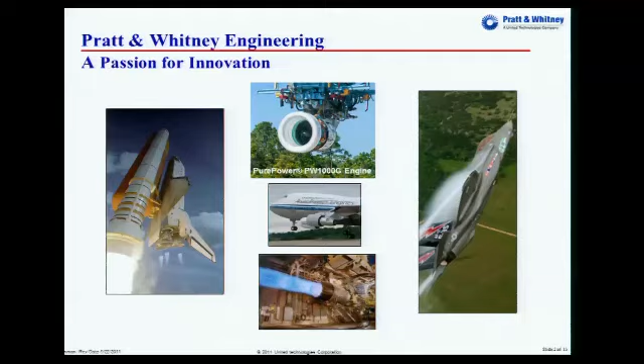All right. Okay, I work at Pratt & Whitney. We used to be Pratt & Whitney Aircraft, and now we're just plain old Pratt Whitney. And Pratt Whitney is the world's largest laboratory or incubator for model calibration and emulation methods. And we also produce jet engines and rocket engines at the same time. But I like to think of it as my own personal laboratory for all the methods that have been developed over the last several years. But in the meantime, we do make something of value every now and then.

We make jet engines, these liquid rocket engines on the back end of the space shuttle are ours, as are a whole lot of commercial and military jet engines. Okay, so the entire title of this seminar was Accelerating Industrial Productivity via Deterministic Computer Experiments and Stochastic Simulation Experiments. Well, I'll tell you just a little bit about how it has accelerated our industrial productivity.

This was sort of a last-minute presentation, so that means a couple of things. That means that some of these slides are as new to you as they are to me, nearly. And number two, that I wasn't able to add a lot of fresh content to it, unfortunately, because it takes a month to get through our legal staff and our legions of vice presidents and so forth.

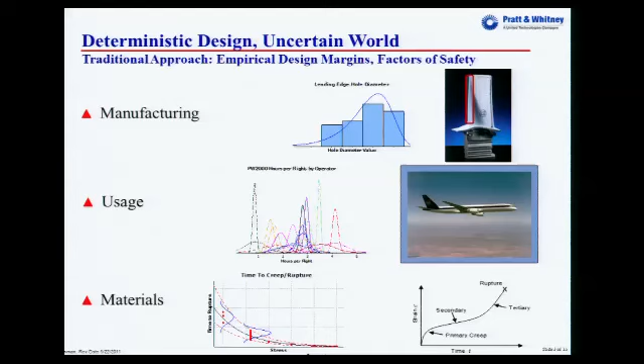But be that as it may, in engineering, prior to the use of probabilistic methods, the engineers have long recognized that they have issues to contend with due to variability in the real world and uncertainty in their models. And they've traditionally approached those using design margins or factors of safety. And here is just a sampling of the types of things that we've had to contend with. Variation in manufacturing processes, variation in the way our customers use our product, and variation in material properties is just a very small sampling of what we have to contend with every day.

But those traditional methods only get us so far. Number one, if you add design margins or factors of safety, how do you know how much is enough? For a given new engine design, should I double, triple, or halve my traditional design margins? And so in order to avoid those sorts of questions, we really need to do things probabilistically.

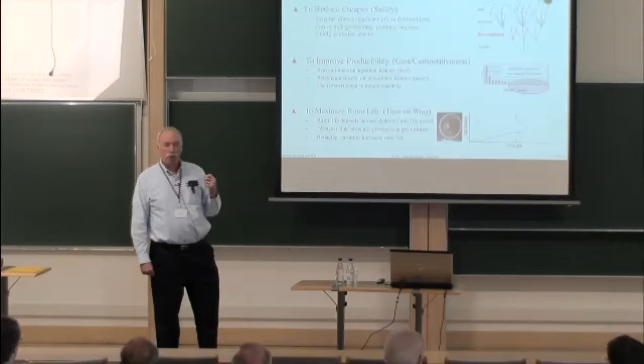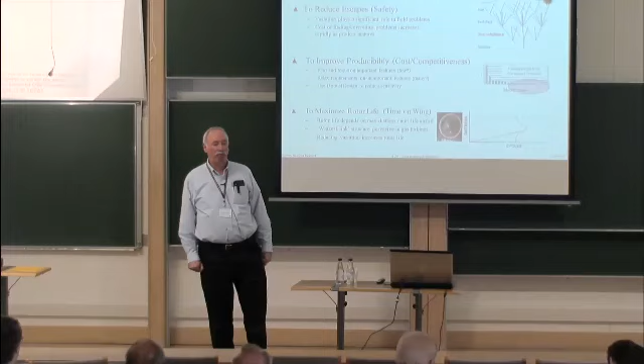And the first person, to his credit, to really discover this from the engineering perspective in our organization was our senior vice president for engineering, who about 2 or 3 months after getting into his job, shut himself in his office for a weekend, went over all the issues that had come across his desk in those first 2 or 3 months on the job, and asked himself, what was in common? What are the common threads running through all these engineering issues that I've had to contend with?

And his answer to that question was every single issue only had one or two things in common. It was either variability that hadn't been designed adequately against or tested adequately against, or uncertainty in models that wasn't adequately accounted for. Okay, so he was my first benefactor who got us started.

That was a few years ago when we actually got a little bit of development money, and we started something called the Uncertainty Quantification Initiative, where we just had to decide how we were going to quantify uncertainty. What paradigm do we use? Do we use fuzzy math? Do we use the Bayesian paradigm? Do we use a frequentist paradigm? That sort of thing. So we spent about a year answering that question.

And then my second benefactor came along, our next vice president of engineering, who took me under his wing and said, you know something? This can pay for itself. It doesn't have to cost engineering a cent. And he said the reason it can pay for itself is when you do one of these variance-based sensitivity analyses, you always show me this nice Pareto chart. We're always worried about things on the exciting end of the Pareto chart, things that make a real difference.

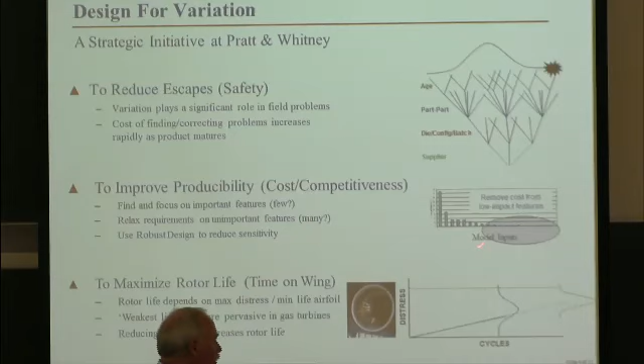But he said, don't neglect things that are on the far right-hand side of that Pareto chart. That's where you're going to pay for yourself, Grant. He said, these are things that we might spend a lot of money controlling in production or in engineering that are really having very little impact on the product.

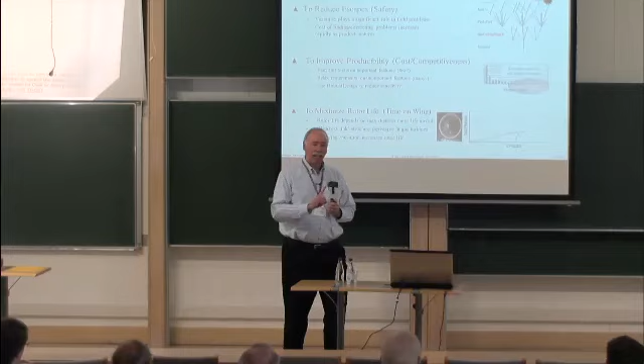And in fact, we found one tolerance that we were holding to tenths of thousandths of an inch on one bearing in one commercial engine, where if we were able to relax that tolerance just a small amount, it was about a $300,000 a year savings in that one tiny little tolerance. So that paid for much more than myself.

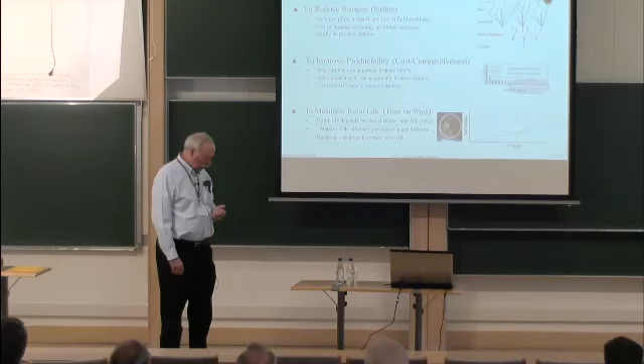Okay, and lastly, there are certain problems that can only be approached probabilistically. Jet engines, as you'll see, have one thing in common. You'll see rotors, rotating airfoils, and stations of stators where we might have nominally 70 identical stators in one position in the jet engine. These are 70 nominally identical parts, but they vary slightly because of production differences or manufacturing

quality differences. However, in the real world, that rotor life, in other words, how long that engine stays in service, is going to depend on the airfoil with the maximum amount of distress or the minimum life. That means that we are going to have a weakest link structure throughout that gas turbine engine. And if you don't approach that problem probabilistically, then you're not going to solve this problem.

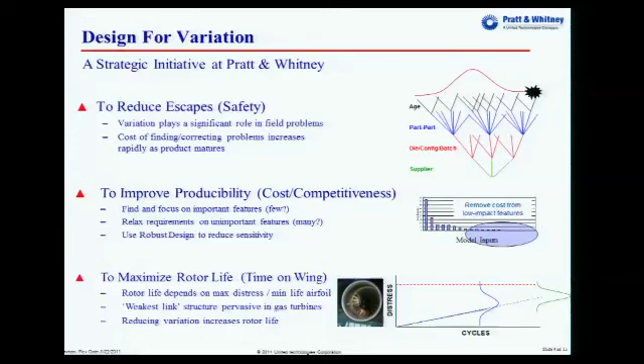So we found that simply understanding that variation from one airfoil to another and reducing it, without doing anything to the level of engineering technology in the engine, we can easily double the life of the rotor by just understanding that variation from one airfoil to the next.

Okay, so once all of that pre-work took place several years ago, we were given the uncertainty quantification project, which then, once we graduated from that and demonstrated that we had the ability to understand and model variation and uncertainty, has turned into the Design for Variation Strategic Initiative at Pratt. Now we've graduated. We're no longer a demonstration project. We're actually changing the way that engineers design parts for gas turbine engines.

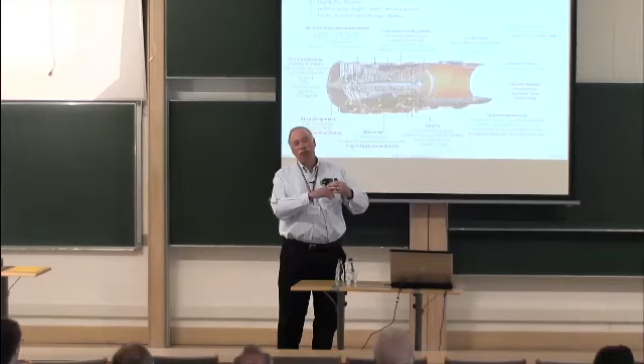So our strategy was first to identify all the key modeling processes throughout Pratt and Whitney. Second was to tell them what they needed to do to their processes. Do we need to invest in all new finite element software, or do we need some sort of probabilistic computational fluid dynamics? So we had to answer those sorts of questions. And then finally, provide resources under this strategic initiative for these key processes to modify themselves.

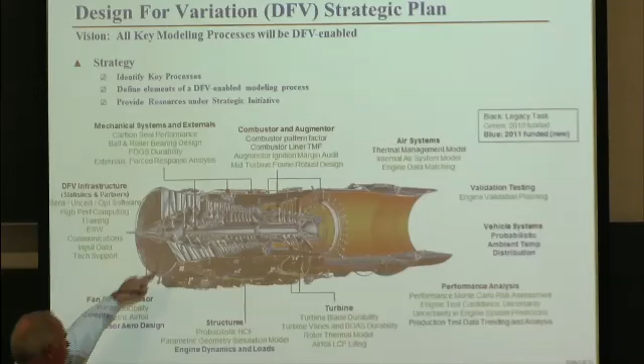So this slide just shows that cutaway from a typical gas turbine engine. And you can see the problem I was talking about. You might have 50 airfoils here, 40 here, and it varies by stage. But the weakest link structure is pervasive throughout the engine. And it also shows that we're working on probabilistic design in every single aspect of gas turbine engineering. There's not one that hasn't been affected now.

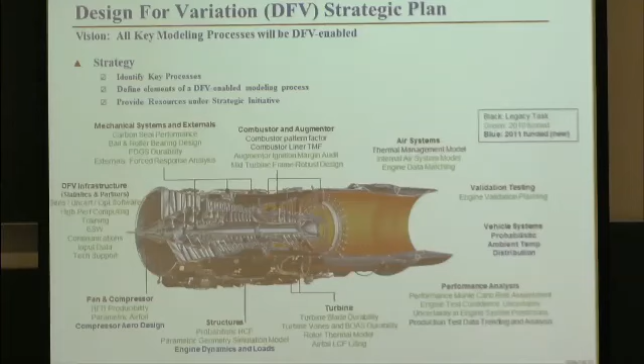And at the nose cone out here, we have our DFV, or Design for Variation Infrastructure team, which is comprised of a small group of statisticians, as well as our partners in high-performance computing, training, and other areas of the company. And I'll go into that in a little bit more detail.

Okay, I had indicated there that we had to change the processes somehow. This was a very large undertaking. You're talking about deterministic engineering design processes that had been embedded in the company for dozens of years. And to change those was not going to happen overnight, first of all. It happened over a period of years, and we had to give them, in essence, here's what we need to do in order to move from a deterministic design-based process to one that's probabilistic.

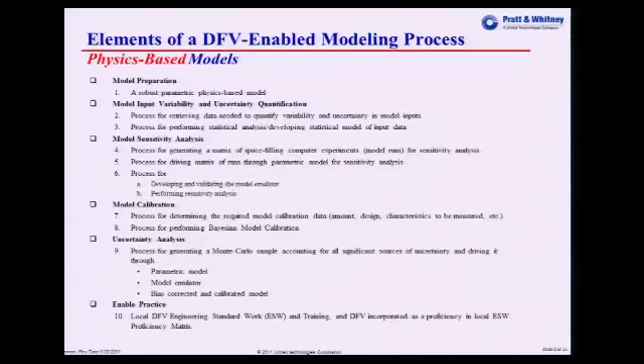So we gave them criteria that they had to meet in order to become a DFV-enabled modeling process. And so here's their checklist. Notice that we would not let them design parts without having a calibrated physics-based model. So they couldn't just enable their models to do things probabilistically and run off with them. They had to be calibrated. And that means that we had to have test data or some type of real-world data that was brought together with their simulations in order to calibrate, bias correct, and quantify all the important sources of uncertainty in their model.

Okay, and design for variation, the process that we developed, has these 5 components to it. We don't just analyze using the process that I'd laid out on the previous page. We actually have to start with defining the customer's requirements. Now, we're moving out of a deterministic engineering world where even a lot of our requirements are deterministic.

So, for example, we go back to the customer, and on a particular airplane, they had a rigid requirement that no more than 500 BTUs worth of heat could be returned to the fuel tank. So we use jet fuel not only for the obvious reason, to produce thrust, but we also use it to cool some jet engine components.

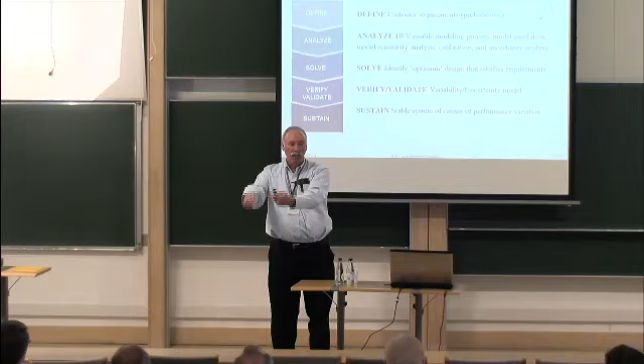So as that fuel cools the components, it picks up heat and returns that heat to the fuel tank. So we had a deterministic requirement that the Air Force had given us, that you can't exceed so many BTUs returned to the tank, period. But everybody knows that probabilistically speaking, on rare occasions, we exceed that.

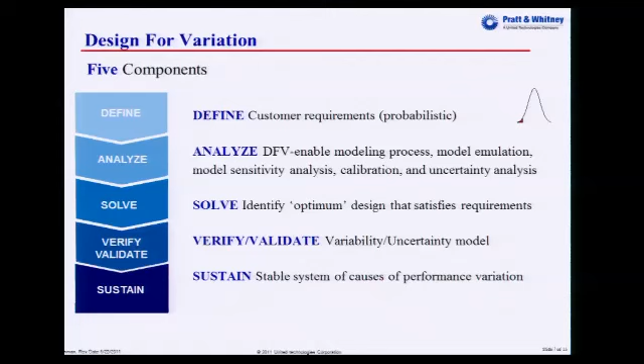So the first task here was to define what frequency is an allowable frequency. That got into some interesting decision theory problems. So we formulated it as a decision theory problem. We involved our customers, our engineers, and solved it. So we need that to have a design allowable to start with.

And then, of course, we go through the analysis process, and we solve. So we find the optimum design. Though that in and of itself is a very difficult problem. This is the robust design, or what exactly does it mean to optimize a system probabilistically? There are any number of ways of formulating that optimization problem.

And then, of course, we have to verify and validate and sustain our model over long periods of time, since these aren't research projects, we're using them to design jet engine parts. We also have to monitor the real-world processes that our variance-based sensitivity analysis told us were important to the lives of these components. We have to make sure that we monitor and sustain and control those that are under our control. And if they're not under our control, we certainly have to monitor them.

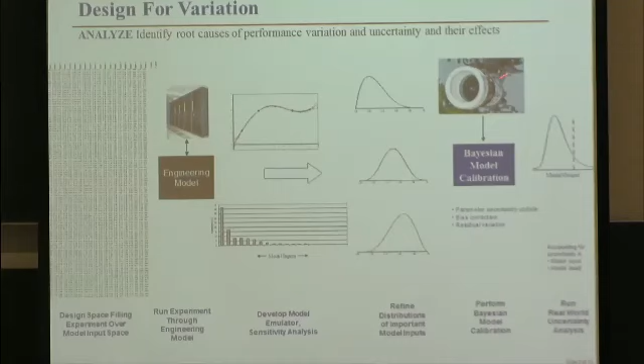The sensitivity analysis then directs us to what inputs are critical to this particular design. We focus and refine our input probability distributions for those inputs. We also perform the Bayesian model calibration. And by the way, as a result of our uncertainty quantification effort, we've decided our entire uncertainty quantification paradigm is Bayesian. So the entire thing from beginning to end is one very large Bayesian paradigm.

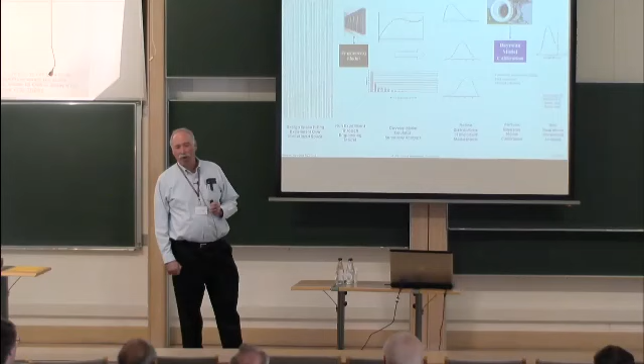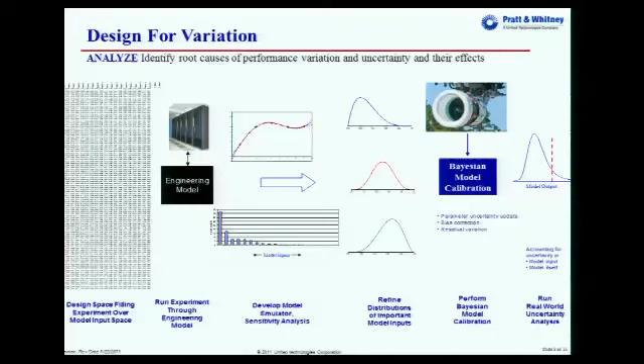And then, of course, in the end, we do our real-world uncertainty analysis, and we differentiate between probability statements that we make in the virtual world and probability statements that might be able to hold some water in the real world. So back here, we might do some virtual uncertainty analysis, but it's only after we do the Bayesian model calibration that we can make statements that might make sense in the real world.

Okay, I told you we have an infrastructure organization, and this has been extremely important. Without this, we couldn't have executed at Pratt. And we do things like develop and maintain software. And this is a little bit of our software suite that we use. So we have a lot of tools that are built in R and MATLAB, for example. WinBUGS is used frequently. Of course, GEM-SA, which came out of Sheffield, and GPMSA from Los Alamos are frequently used pieces of our toolkit.

Also, we use the iSIGHT-FD software. That links multiple codes together. In every one of these disciplines, one thing that we found interesting was that in any design task, there's never just one code that's being calibrated or used in the design process. There's always multiple codes. And on average, you might have anywhere between 6 and 10 codes that are put together in order to design for a given criteria.

And then, of course, there's SAS, and we're still trying to get SAS interested in solving certain computational problems for us. We need a little bit of help there. If anybody in the audience is from SAS, I'd like to talk to you.

Okay, and then we're developing our own in-house codes now called BECCM. And we'd like to actually enclose that in a little football, but we might run into a few problems there. It stands for Bayesian emulation and calibration of computer models. So what we're trying to do is create a system that will do full Bayes or modular Bayes, and will do steady state and transient analysis, basically an entire toolkit for emulation and calibration of computer models.

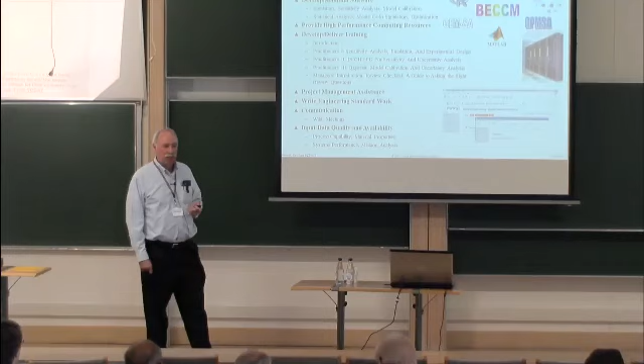in order to make this work. And then, of course, we can't leave the managers behind. If we do that, we're bound to fail. So we've developed an introductory class for managers and a guide to asking the right review questions. So we have to let the managers know, what are the right questions to ask? Where could a probabilistic analysis fail? And believe me, these guys are hard.

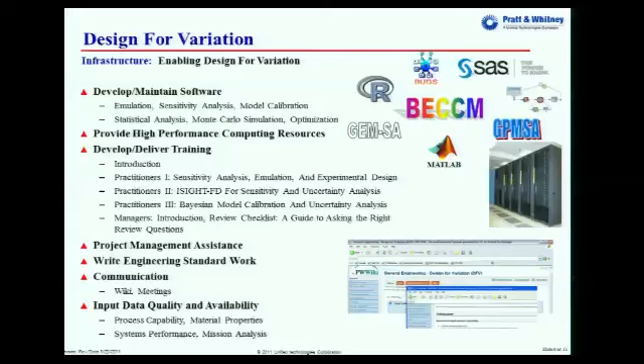Okay, and of course we provide project management as well as technical assistance. We help write work procedures. We run a wiki page that lets people know what's going on, how to run software, that sort of thing. And then we always have to worry about input data. The input data required for these analyses is fairly large. So that's a fairly large job in and of itself.

Okay, this is just an example of, in our training classes, we try to find small problems that have high pedagogic value. And that is those problems that are easy to wrap your head around the physics, but yet contain a lot of good lessons in terms of the overall sensitivity and uncertainty analysis process. One of those that was very interesting was published by a couple of physicists in an applied physics journal a few years ago, where they had come up with a new way of solving the beam deflection problem when you load a beam both uniformly and with a concentrated load.

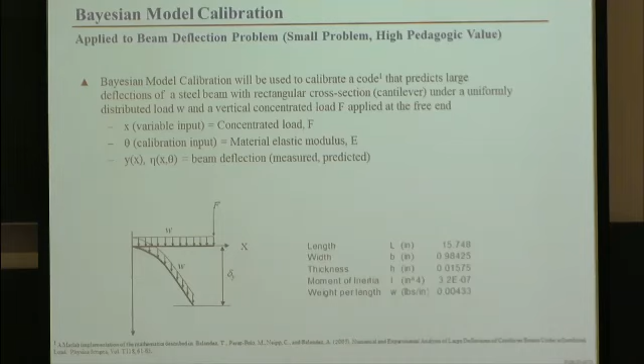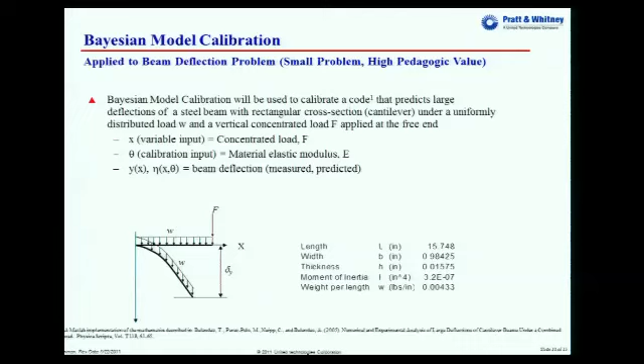And that's a solved problem. Bernoulli solved it 300 years ago. But these fellows came up with a new way of looking at it. Instead of using bending moments, they used the shear force formulation. It got you away from some nasty elliptic integrals in the solution. But the nice thing about it for us was that it was a very nice, neat problem setup. They had one variable input, the concentrated load. They had one calibration input, which was Young's modulus for this particular beam.

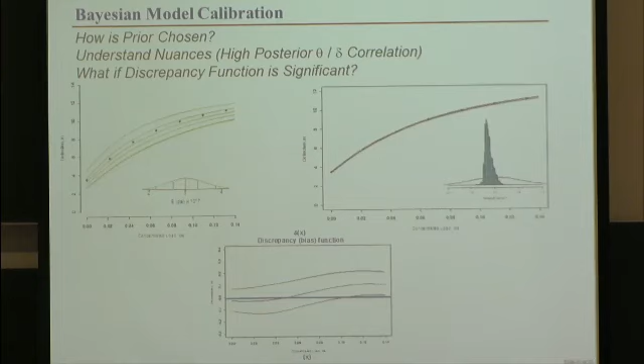And best of all, they gave us an idea of how to set up the physics, so we had to set up the code ourselves. But they gave us some real-world data. They had run an experiment also to validate their model. So we've sent a thank you note to them, and we told them that it helps engineers to be able to see things on a small scale, what they'll have to contend with on a large scale. Things like, how do you choose that prior distribution for Young's modulus in this case? How do you go about that and do a serious job of it?

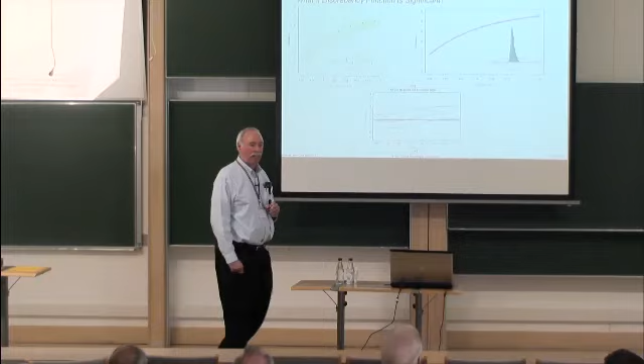It helps to understand the nuances, things like the high posterior theta delta correlation, the posterior correlation between the model parameters and this discrepancy function, and to understand, and we have lively conversations about this, what to do if we find a significant discrepancy function. What do you do with that in an engineering environment? Do I incorporate that discrepancy function into my design, not knowing the physics behind that discrepancy function? Are they comfortable using it? So we get into some pretty lively discussions, especially since in this cantilever beam problem, there actually is a small but significant bias or discrepancy function running around.

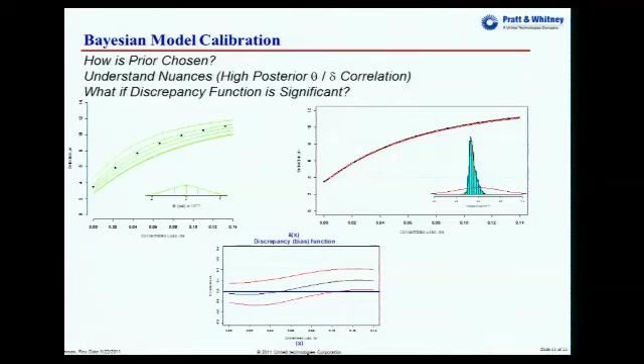Okay, applications. We've had hundreds, we might be getting close to thousands of applications now. We've used it at Pratt for reliability improvement and problem avoidance. We know we've already avoided at least a couple of fairly catastrophic problems by running through this analysis. We've used it for robust design. We've used it in many places for cost reduction. And this is interesting. I found that give a tool time and it will grow. Its sphere of influence will just get larger and larger.

So how is it growing? This effort's growing in two different ways. Number one, it's going cross-disciplinary. Once engineers have learned what emulators are and how to use them, they'll want, okay, so I have a structural emulator here. Maybe I can emulate my aerodynamic characteristics of the part, and I can put them both together and optimize both for aerodynamic properties as well as for structural properties.

And then I can enlarge it another way and go to subsystems. So I've got emulators for turbine life, and I can couple those with combustor and compressor emulators, put the whole thing together and do subsystem optimization. So that's been pretty exciting. We're using them in manufacturing, in process control. We're using them to decide what to measure and what not to measure.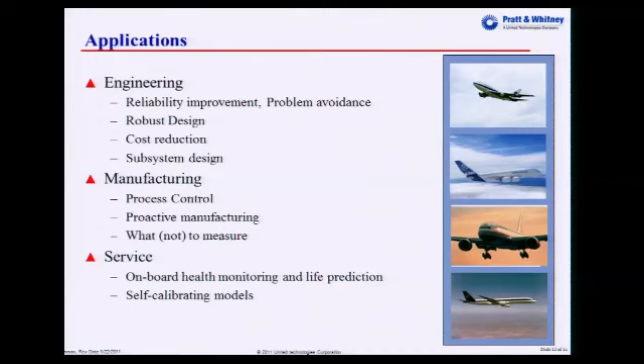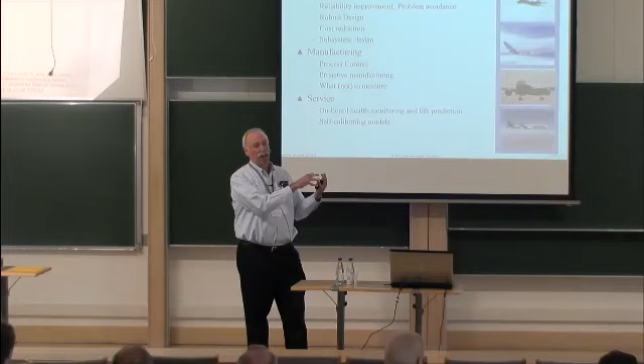And then in service, these are some of my favorites. We've got onboard health monitoring and life prediction due to these emulators. So we're actually onboard calculating structural lives using these emulators and all the data that are flowing into it. And then an effort that we just finished up was we designed our first self-calibrating models, where as the models are residing on board real time in the engine and they're collecting data, they're self-calibrating to that particular engine serial number. So it enables you to predict the performance and life of various turbine engine components.

And I thought as one last example, I would show you we've developed a very complete system for the prediction of high cycle fatigue risk. In the jet engine world, this has remained one of the last unsolved problems, which is predicting high cycle fatigue, which is nothing more than, think of a part vibrating at very high frequency and developing cracks as a result. And sometimes this happens very unexpectedly.

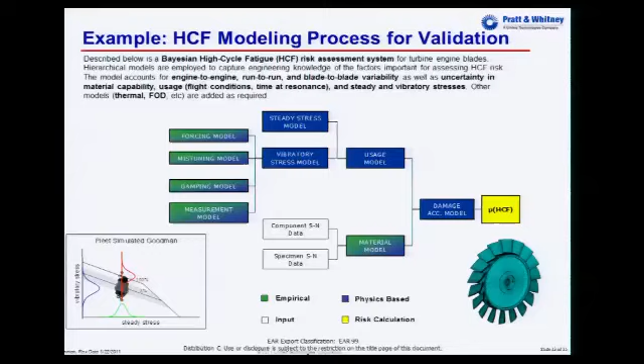Well, we've spent a couple years putting together a complete high cycle fatigue model with a computational fluid dynamics-based forcing model, a mistuning model. Sometimes you can have these airfoils in a rotor where just the way that you arrange the airfoils in the rotor will affect the vibratory response of the entire rotor. It's a concept called mistuning. And we have damping models, measurement models, steady stress and vibratory stress models, models for how the customer uses the particular engine, and then material characterization.

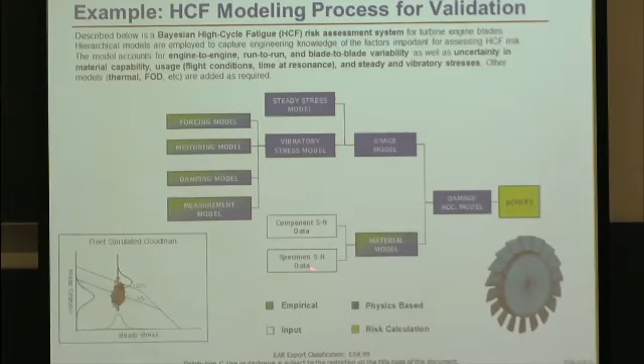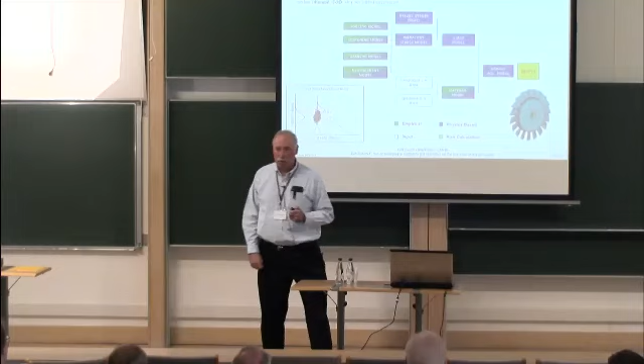That's getting really interesting. Materials have been characterized empirically for decades now. We're now moving into physics-based material models where we're able to predict the physical characteristics of materials using physics-based models. And that's an area of recent focus.

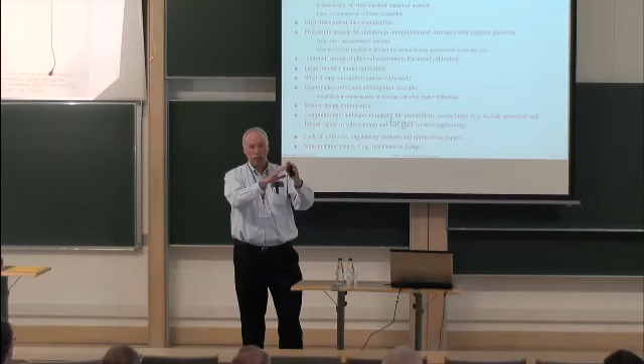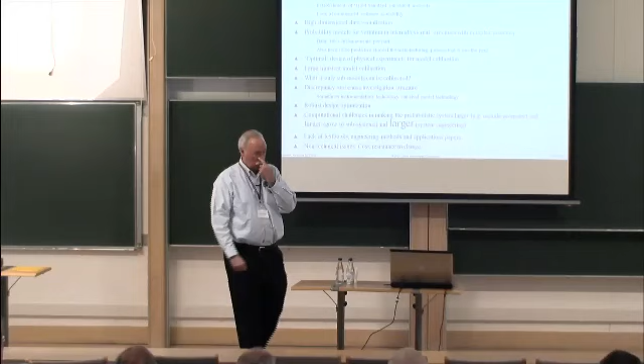And then finally, I'm going to talk more about these tomorrow, I believe. We have a long list of challenges that we'd like to put out to the community that crosses the board. One of the more interesting ones is we're learning how to measure parts very efficiently. Now we can capture the external shape of a complex turbine airfoil almost instantly as they come off the manufacturing line, using things like white light inspections that will capture this part at 40 to 100,000, sometimes 200,000 inspection points, and it will automatically create a finite element mesh for that part, and it will solve thermal and mechanical stress problems right there. And we're doing that with emulators as well.

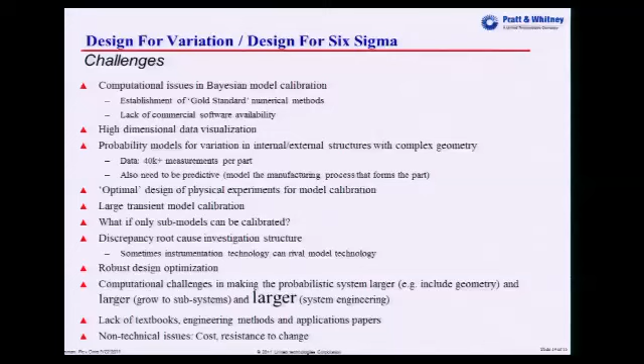But this also presents us with some nice problems. Well, one of our inputs to our model is now an array of size 40,000 or 50,000 or 70,000. We need compact but informative representations of those probability distributions of the external and internal shapes of the components. And we already have at least one mathematician on board working on different ways of representing that variability in three-dimensional space, internally and externally. But I'll talk about that some more tomorrow. Okay, this is one of my favorite quotes from Peter Bernstein.

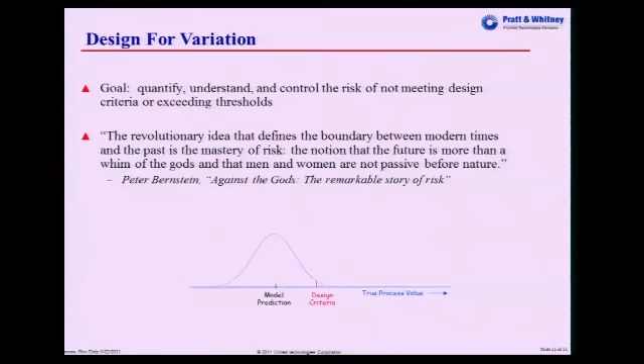You mentioned using decision theory and eliciting utilities from clients. Have you looked at, rather than variance-based sensitivity, considering how inputs contribute to decision uncertainty? Or are you just using only variance-based measures of importance?

Right, we have not. So this is an area that hasn't received a lot of attention. So any ideas that you'd like to recommend, feel free to catch me later on. And that's an area that I would really love to talk to people about, because we have dozens of criteria that are purely deterministic right now, that are not well posed.